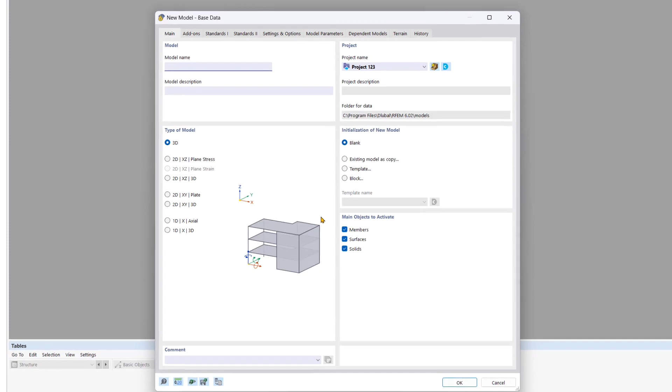In the new window, we will define the base data for our model. The window is divided into several tabs. Let's begin with the main tab. Enter the desired model name, along with a description if you'd like. In the project area, you can assign the new model to an existing project or create a new project to save your model. And then for this tutorial, we won't create a project.

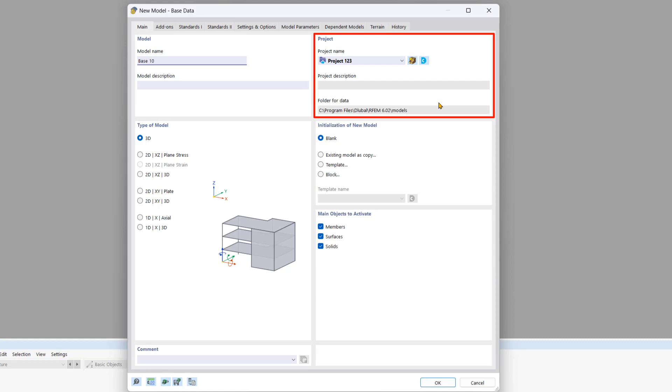In the type of model area, you can select the kind of model you want to create. You can choose between one-dimensional, two-dimensional, or three-dimensional models based on your requirements. RFEM 6 also allows you to create one- or two-dimensional models with three-dimensional loadings and a bitmap that can be used for visualization.

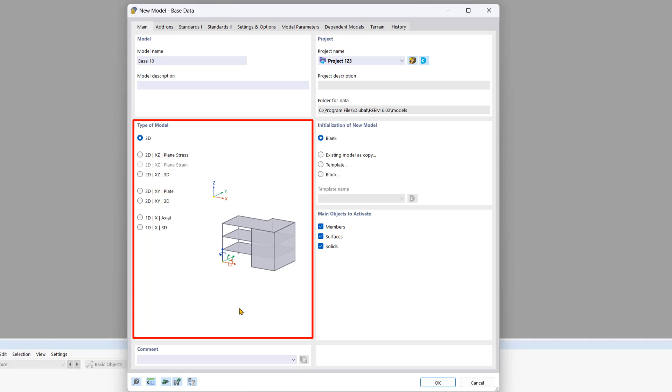To define the units and decimal places, you can click on the symbol in the bottom left-hand corner. This is where you can select the desired category on the left-hand side, and then you can set the units on the right-hand side.

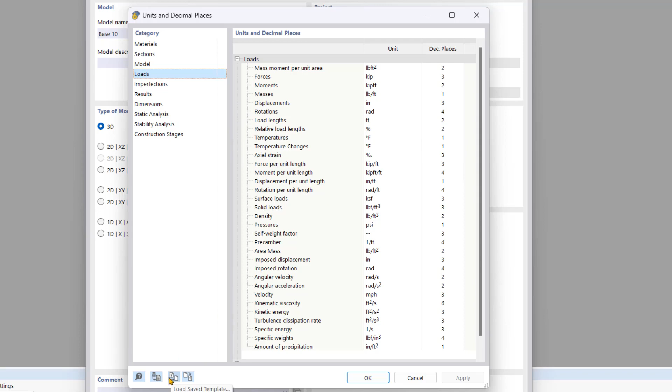You can also switch between imperial and metric units by going down to the symbol down here and clicking Load/Save Template and selecting between imperial and metric, and you can also choose the default which you would like here on the right-hand side. We're going to stick with imperial and click OK, and then click OK again through this dialog box.

Now let's move on to the Add-ons tab. This is an important change to note compared to RFEM 5. With this change, now you can define certain design parameters while you're modeling, which saves you time.

Up in the top right-hand corner, this is where the standards for classification and wizards area is, and this tool allows you to define load combinations, wind loads, and snow loads automatically if you have these options checked on. For this tutorial, we will activate the Structure Stability add-on along with the Steel Design add-on.

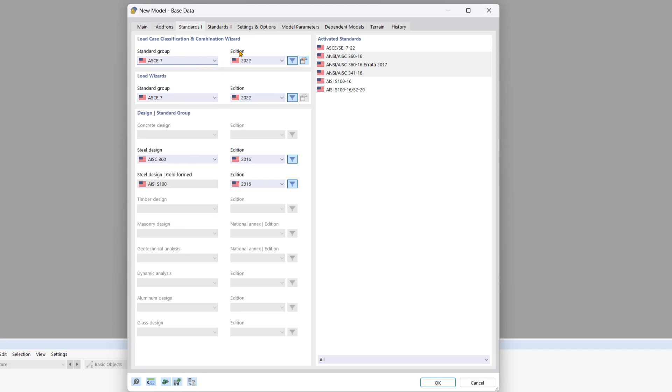Now let's move on to the Standards tab. This is where you can select your desired standard along with the National Annex if applicable. You can also choose the design standards down here as well.

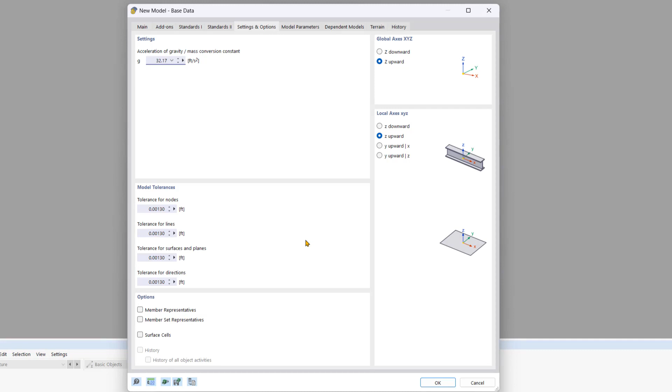Next, we're going to go on to the Settings and Options tab. This is where we can adjust additional settings like the acceleration of gravity, directions of axes, and model tolerances. For this tutorial, we're going to keep all this by default and move on to the Model Parameters tab.

In this tab, you can enter the exact location of your structure. With this, RFEM 6 can automatically determine wind, snow, and seismic loads based on the selected standard and annex. There's also an option where you can import the location from a map using this symbol.

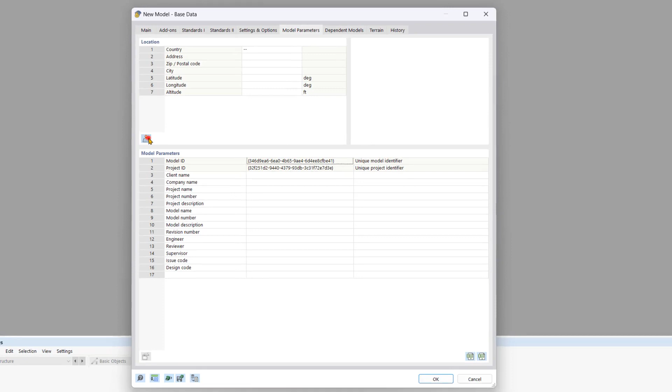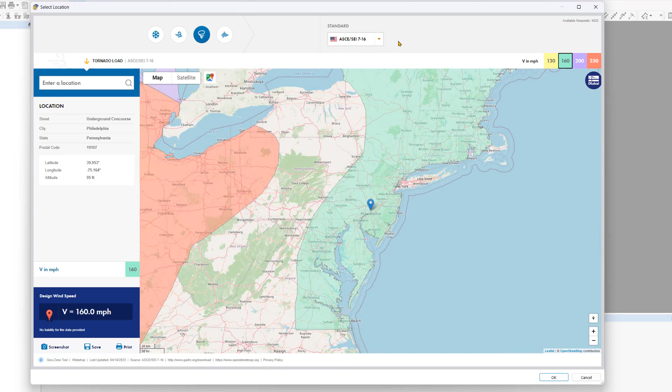For example, I could type in Philadelphia and choose Philadelphia, Pennsylvania. Then, based on the standard, I can see all of the parameters for snow, wind, tornado, or seismic. Then, once I click OK, this information will be loaded into RFEM 6.

We aren't going to cover the remaining tabs in this tutorial. Once you've made all the necessary changes, click OK. Another change in RFEM 6 compared to RFEM 5 is that once you click OK, the file does not yet exist. So to save the file, go up here to File and click either Save or Save As. Click OK. And this is where you can select the storage location of the file.

This concludes our video on creating a new model and defining the base data in RFEM 6.